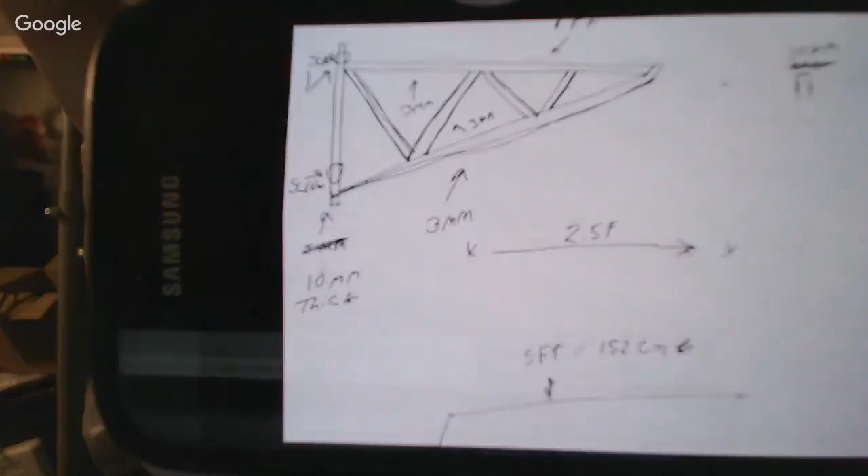Ah yep, got it. So the idea I was thinking of is I need to have the triangles inside the actual triangle frame to hold up the weight that I'm looking at. I don't know how much the weight is going to be. Is there a way that you can calculate weight for how much supports you'd need, or would it not need the supports because it has the supports in the infill?

Yes, this, okay, now this is where we get into structural modeling and finite element analysis, and this is what I went to school for. You can do stuff like statics and dynamics, deformation of materials. You can run these calculations if you know things like the cross sectional area or the second moment of the area of the part, and you can run a beam deflection calculator on it if you integrate along the varying area and varying second moment of area. You can exactly calculate ahead of time what your beam deflections will be.

Yep, static engineering, got it. A long, widely respected profession. It seems like rocket science to a lot of people, but people have been doing this for ages, ever since calculus was applied to engineering. So yeah, you can absolutely do that - a lot of engineers can do these calculations.

However, once you get to trusses, it gets a little more interesting because you're dealing with multi-part scenarios. A lot of people in statics and dynamics, and then deformable body mechanics, are taught how to do that with pin joints. It's a little harder to do with fixed joint things, where the beams are kind of structural. It's even harder when the material is not homogeneous - it's made of strands, right? That's when stuff gets a bit harder.

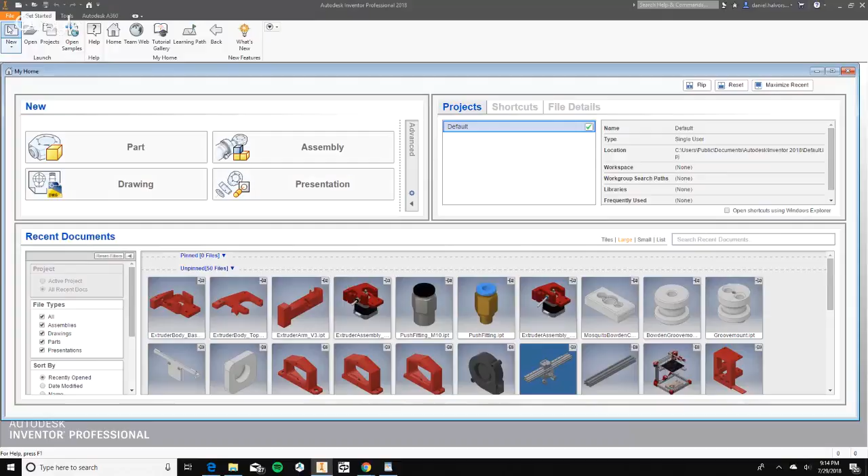Yeah, it's Inventor, a $1,000 program, guys. Yeah, I have a copy of Inventor - they sent it to me to try. I was like, what?

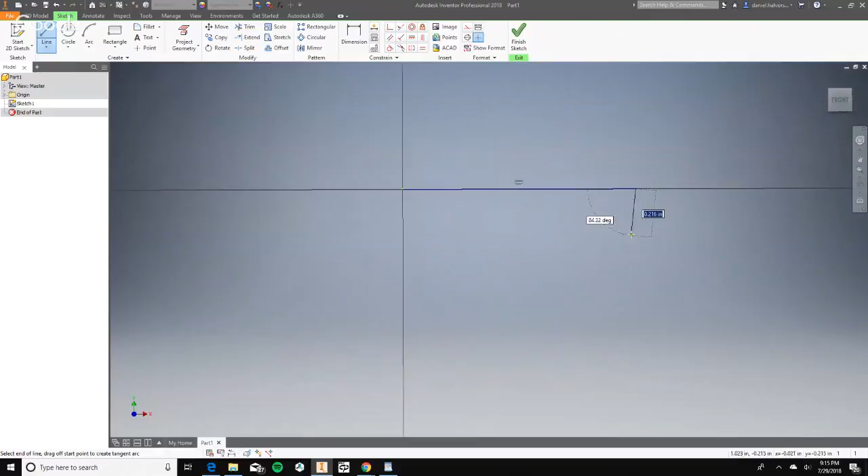Yeah, so here's - okay, let's see what we're dealing with here. We've got some shelf, and then we've got there, and then we've got there, so we've got this here. I don't know what your dimensions of this thing are.

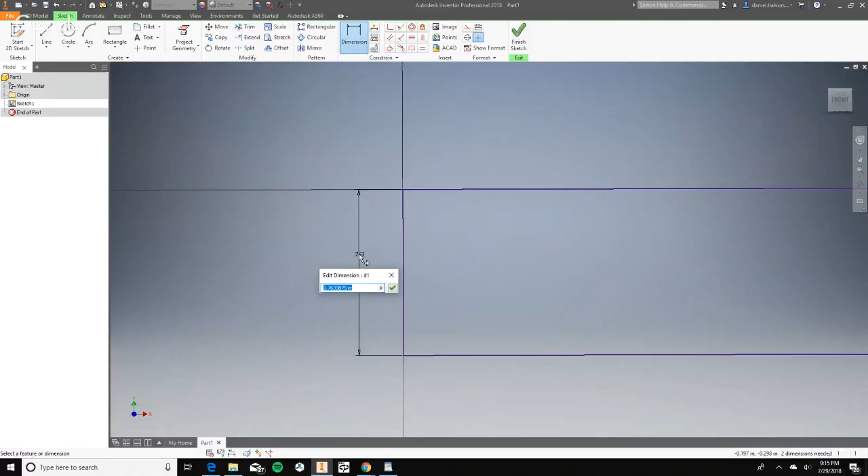Would you mind giving this to me - the overall size? I had it written down at 1 foot for length, that's what it came up with. I figured we would be about the right type of length. I figured 3 millimeters was going to be the back plate, where the triangles would connect. I don't have a length for that unfortunately because I didn't calculate it. But it was going to be overall about 3 meters thick, and I was looking at 10 meters.

Was it 10 meters? I said 10 thick - millimeters, yeah, 10 millimeters thick by 3 millimeters height for each connection for each of those. And what was the overall height of the thing? Overall height, 1 foot by length, and I didn't really calculate the height of the end of that yet.

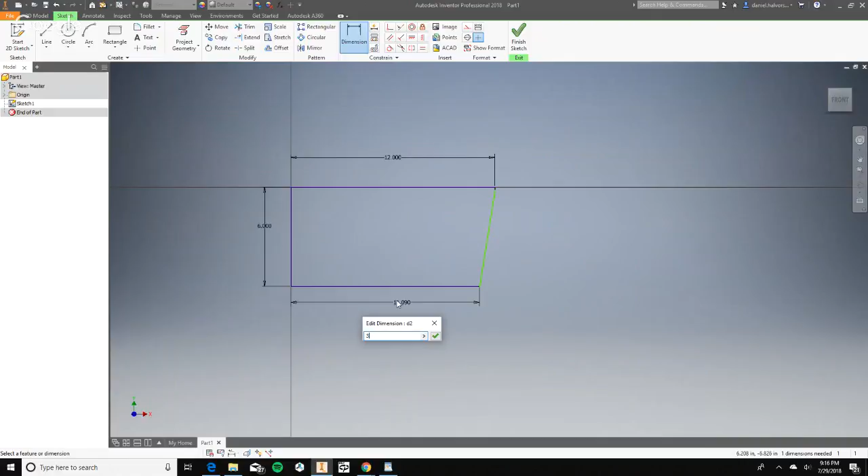Say it's like maybe 6 inches, and this is like what - 3 millimeters, this is also... You know what, let's make it all metric. I'm gonna do 300 millimeters for that, and I'm gonna do 150 millimeters for that.

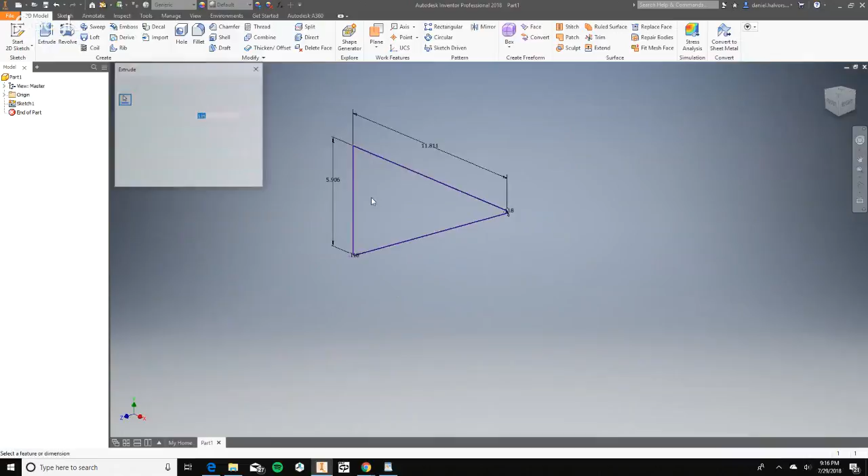All right, so say we've got this, and we're gonna extrude it. What was it, like 10 millimeters? I said 3 millimeters for extrusion actually, if I remember correctly. Okay, so I'm gonna do 5 millimeters because I'm gonna show you something nifty.

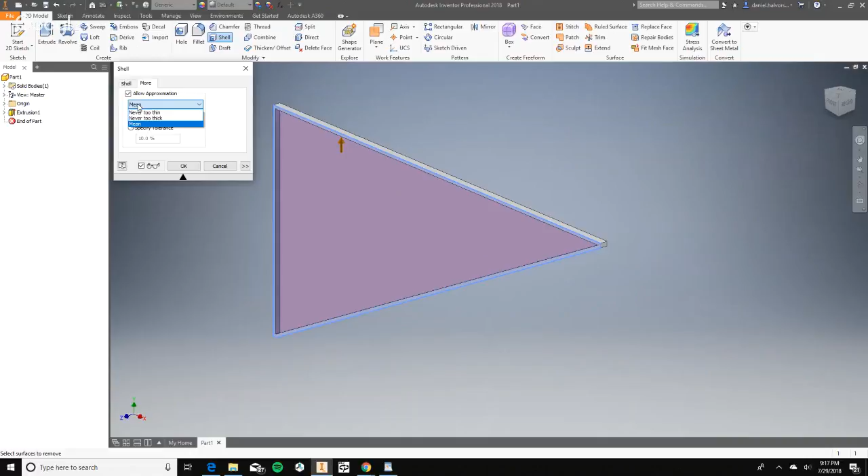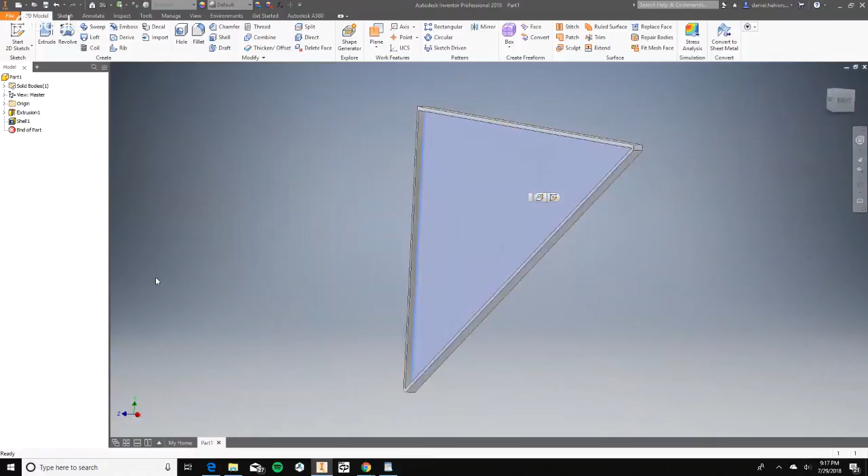The shell tool - so if we do it, it should work. Here we go. So what I did here, if you can see, is I hollowed out one side, right? So basically what we have is a triangle that's very, very hollow, very slim, and it's got this kind of a rib connecting the sides, right? You know what I mean by a rib.

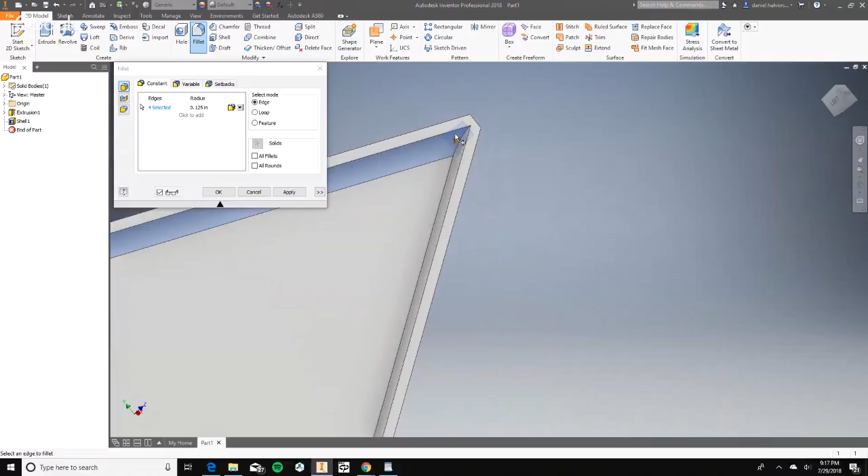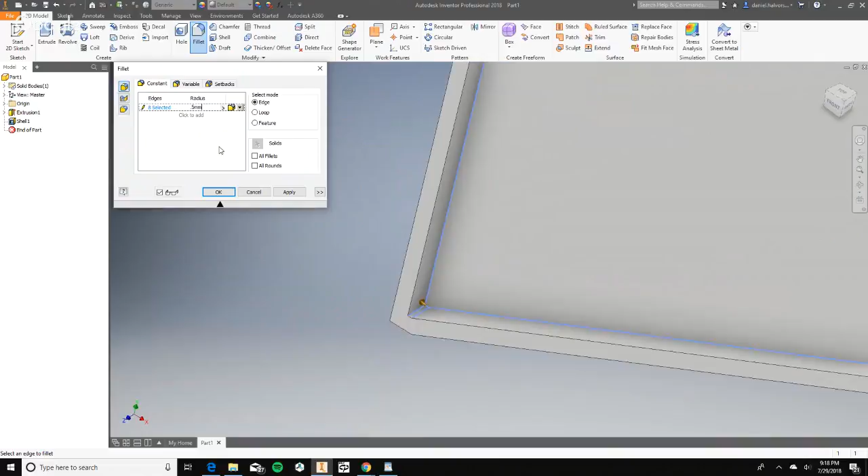Oh, I know what you're doing. Here we go.

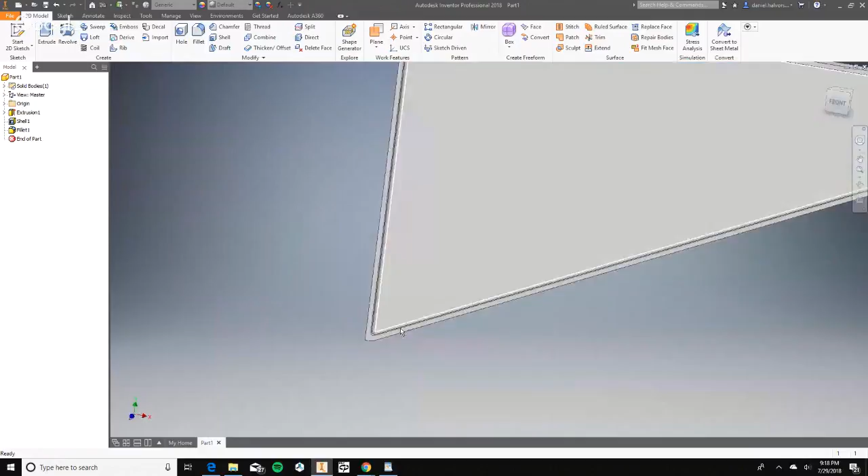So here we go - sorry if this is making you guys motion sick, I'm a bit used to it by now since I'm the one running the 3D mouse. So, all right, what this does - the fillets avoid stress concentrations, meaning sharp corners are where stresses in the material will tend to build up and break the material. So filleting ensures those stresses are a little more evenly distributed.

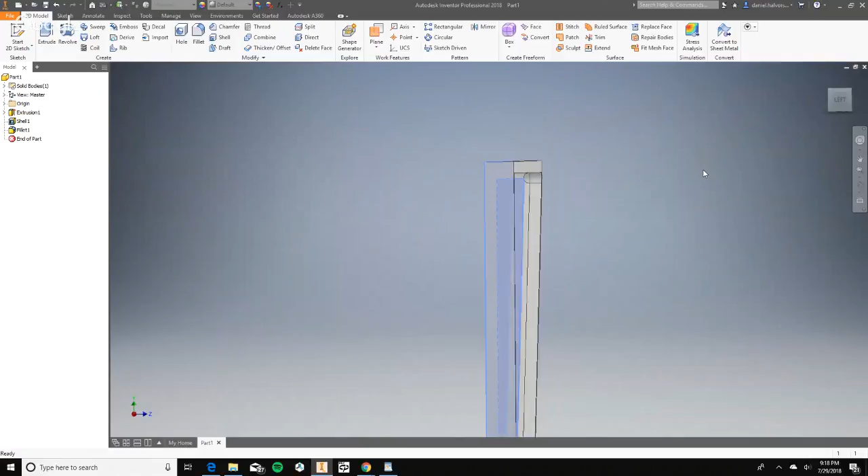So okay, here we have a part - I'm just going to highlight both of these so you can see. See what we're looking at here? It's got a very thin triangle around the edge, and then it's got a rib that's basically thickening it, or connecting it, but the majority of this side is kind of cut out. That ensures a lot of weight saving - in fact, this thing barely weighs any more than if it were just the thickness of that rib.

The thickness of this outer shell is not very much - just from here to here is like 2 millimeters. But it's actually substantially stiffer than if it were solid because of the higher second moment of area. So that gets into kind of statics and dynamics type stuff.

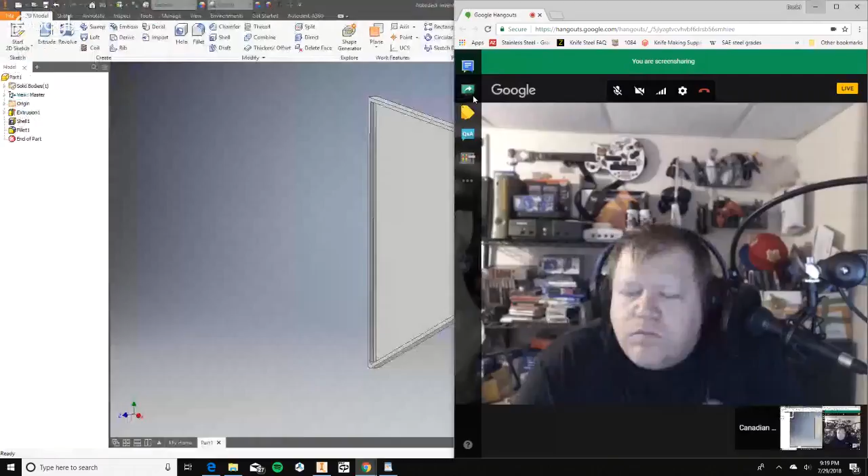Okay, now we're back. So that's kind of how I would design that. Probably sheets - sheets can be very sturdy for the thickness of them. That's what he was talking about, that we have to do it in sheets. That part of the CAD process gets me confused. I'm so used to doing it on paper with a pen, doing calculations when I'm building with wood. Going to 3D building is a bit of a different thing you have to go through.

Bringing circles into a triangle is what Chris Riley said. Yeah, I understand why you'd want to round off those areas, because that gives it more structural strength. That's what I was thinking too - how do I make that? That's why I was thinking trusses instead of circles. And when I saw you highlighting that area, I realized you were rounding it off so it has more structural strength - that's exactly what I was doing. Rounding that off avoids stress concentrators.

So I'm just CADing up an extra interesting bit here that might interest you guys - an extra thing you could do to increase load bearing capacity. I've never done CAD demos or anything before to show people, so...

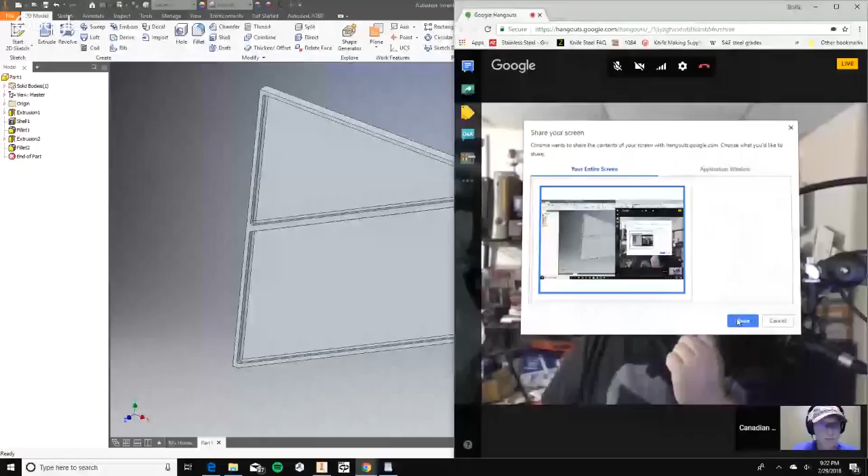Yep, here's one other thing I added - see this extra rib in the middle? Yeah, I see that right there. So what this does - say you've got a sheet or a shelf sitting on top of this whole thing, and you want to transfer its weight down into the wall here. This would take the midpoint and offer a nice short path of strong, solid beam, taking that force and redirecting it straight into the wall.

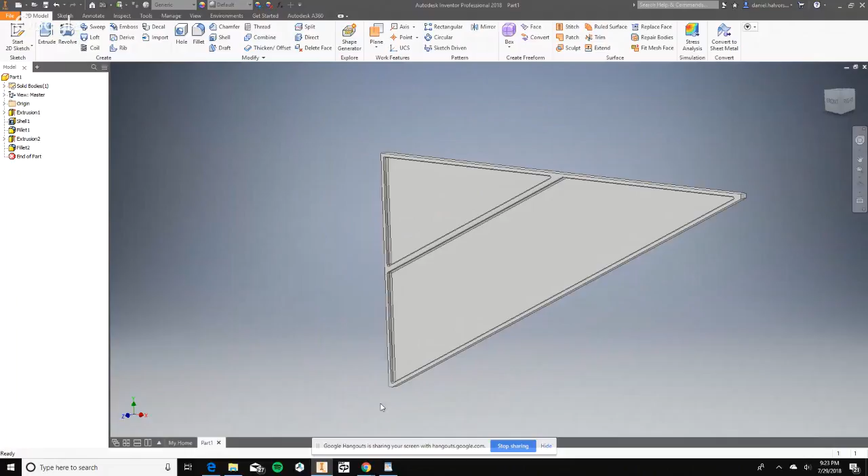This would also give you, if you had more mounting points, like 3 sets - down at the bottom, halfway in the middle, and at the top to screw into the wall - this would really increase that. Also, this will stiffen up the sheet in the middle, this flexible, thin back plane, and keep that from bending. So yeah, that's now a trick I would use.

Yes, trolling for dollars is right. It depends on if you're dealing with 2D or 3D forces. If you're dealing with 3D forces, you want like a 3D space truss. Not quite a rhombus, just a 4-bar figure - quadrilateral. So it's a quadrilateral, and a quadrilateral on its own is able to flex. But remember, we've got a sheet in the middle - the stiffness of a sheet is to the 4th power, it's very high. If you take a quadrilateral, which would ordinarily flex, and throw a rigid sheet across the back of it, it's suddenly very rigid. So that's okay in this case.

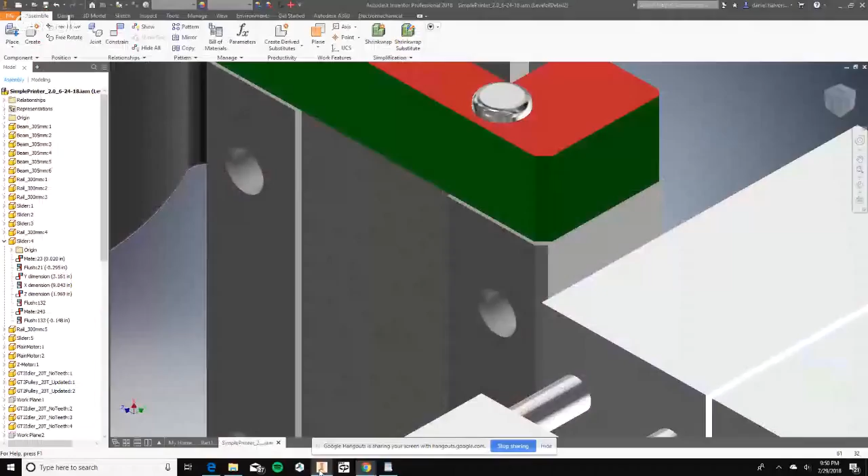Well, I've got something interesting to show you guys. I'm sharing my screen here. Got both videos open? Okay, so here's a 3D printer I've been designing, this is one current iteration of it. I'm actually going to go back a revision.

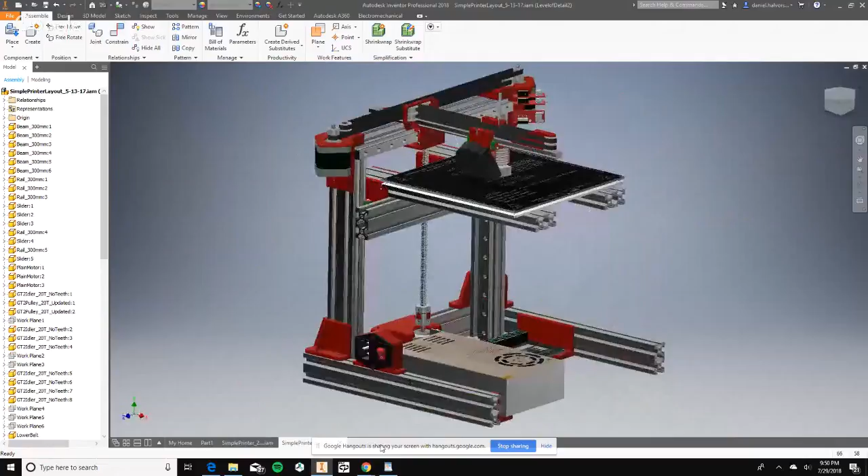Let's see, what should I do? Is this the one you wanted us to name? We're having naming competitions? Let me pull this screen up so you can see it. Got to check on the... might take a little while, but I can see it. Oh, his volume is louder than mine. Yeah, I have a headphone mic and it's a little distance from my mouth. He's got a real mic.

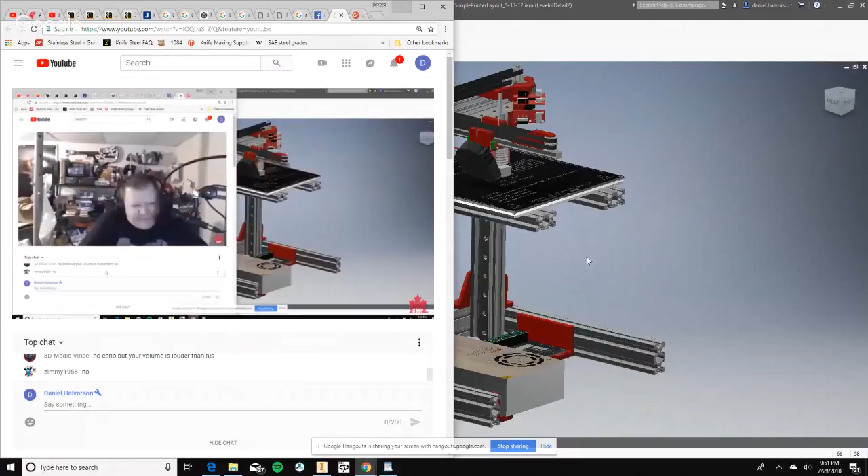Okay, so this is a printer I've been designing for our makerspace. It's almost done, so close to done, and it's going to be sweet. I'm actually going to try and have it working by Tuesday morning, which is going to be a bit of a stretch, but I'm going to give it all I've got.

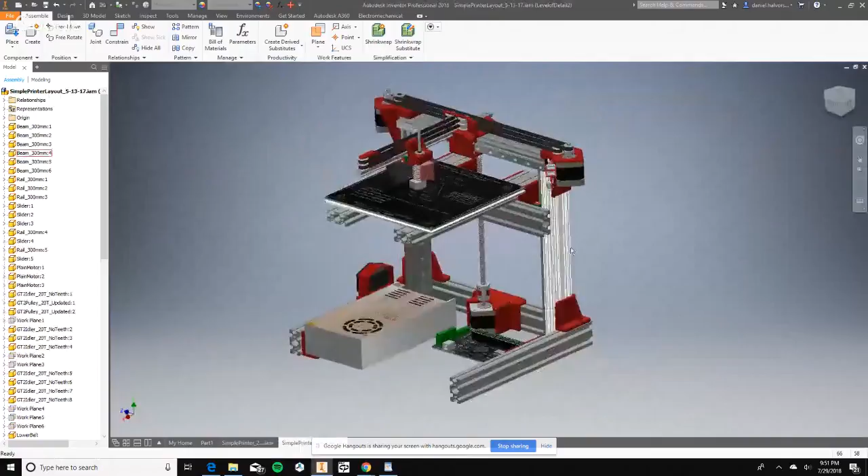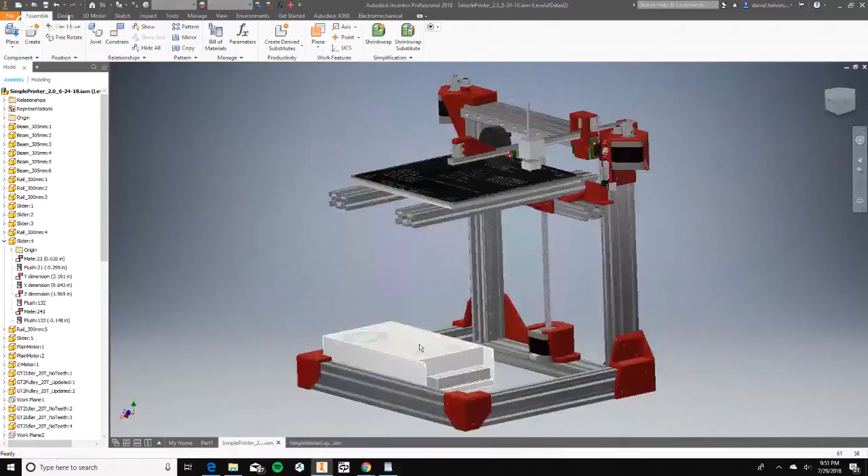The idea behind this is it uses all the same components repeated. All the beams are exactly the same length. Both belts are exactly the same. All the motors are exactly the same. All the idler pulleys are exactly the same. There's only like 3 different types of fasteners in this whole printer. Because of that, you can just buy a bag of stuff in bulk, and it ends up being quite a bit cheaper to build than an equivalent printer.

Oh, you're bringing your webcam back. Can you see me? Okay, yep, we can see you now.

That would be a fun one to do a speed build because there's no sorting of parts, you know? Isn't that always what gets you though? You get this kit and it's like, let's see, I've got a 3mm bolt, I've got a 3mm, well crap, they're like 2 millimeters different in length and I've got to use the right one. There's none of that with this thing. It's all just like either this bolt or this bolt, and you can very clearly tell the difference. It's kind of intuitive to put together because everything kind of only goes together one way.

Yeah, I can see it now. Daniel being way ahead of us. Hey, I designed it, I better be faster than you guys. I had this thing completely designed in CAD and all the 3D printed parts designed, and it was even starting to print them before I ordered most of the parts. So I assembled it in like 2 hours, had it working, XY at least, all the functions were working. It didn't have a Z end stop, so it wasn't able to print.

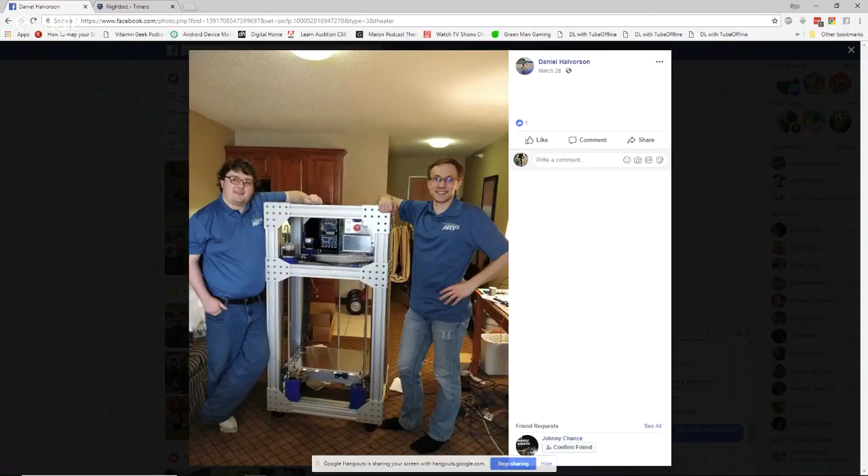Zimmy is correct, it is Eastern time. I just remember that machine - we're watching it roll in and just going like... and I remember Barrett going, 'Oh, you gotta come!' I'm like, 'Okay.' And he brings me in and I see this big block coming through. I'm like going, 'What the?' He's like, 'Yeah, come meet the cult.' It's like, okay, yeah, that was fun.

All these people I knew online. Here is the one that you were talking about. Yeah, let's see if I can pull this up. Let's see here. Share screen. Share. There we go.

Oh yeah, that was the E3D team standing around, and they're just looking at your printer, just staring at it. Couple things - one of the thoughts I was thinking they might be thinking is like, holy crap, this thing is insane. And then the other thing is like, oh man, I wanted to see this moving, but it's not moving. They also have this look of, we got to buy the company.

Well, yeah, we're in a different bracket than them. I mean, they're working with desktop, we're a bit more on the industrial side, but yeah, I really wanted to show them its movement speeds. It's just ridiculously fast - with those NEMA 23 size drop-in servos, that thing is just scary. It can cross that build volume faster than a human's reaction time. I mean, if you had your hand in there, you wouldn't be able to get it out in time.

It's 1.5 meters per second top speed. It's really trucking. So, yeah, the safety panels that we put on there are for your safety, not the machine's.

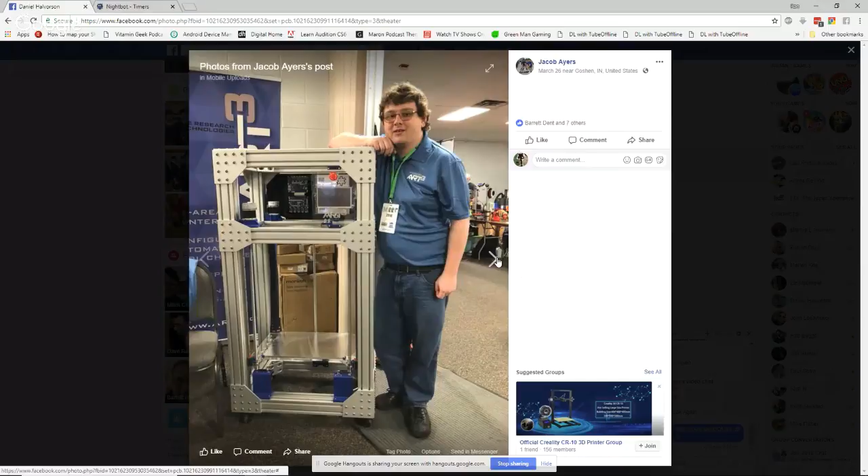The airflow isn't too crazy, as long as you do a PID tune, you'll be fine. A silicone sock is easier than a ceramic wool thing, much easier to slip on and off and deal with.

There's an idea, guys, of what they were doing there. This here is us in the hotel room working on stuff. This is probably taken at like 2 a.m. or something - there's no timeline on this, but probably. So that's the machine they were talking about. I was hearing so much talk about this aluminum monster. That's the one, look at the printers spread all over.

Did you guys actually go to bed that night? Nope, I didn't. Actually, I shouldn't say I totally didn't - I had like a 30-minute nap in there somewhere. Yeah, machine porn basically is the best way to put it.

Eric Cederberg is very knowledgeable. Yeah, so go back, I'm going to cancel this out now. But yeah, I just wanted to show some of those pictures because I thought some of them were pretty impressive.

Well, okay, let's put it this way - I'm looking at buying a printer right now. I'm at that point where it's like, do I go Delta, or would you not recommend Delta? What's your thoughts on Deltas? Okay, I have mixed thoughts.

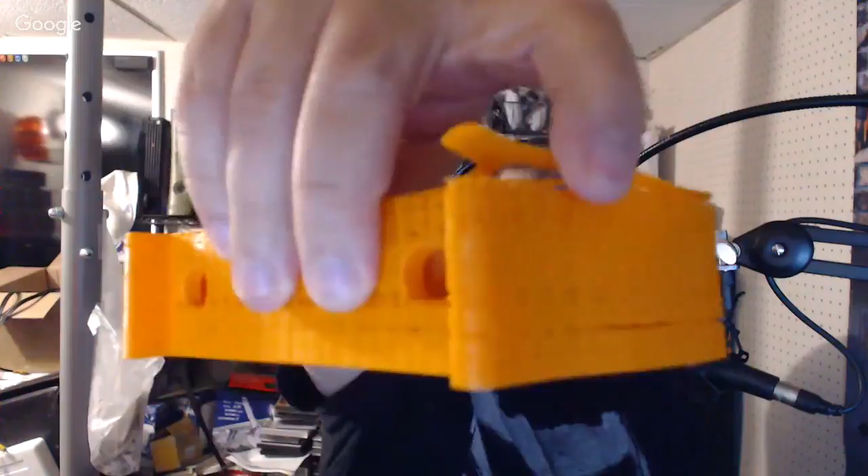Hey, there he is. My orange PLA was brittle, okay? But I want to show you what also it was doing because of it being wet. In print, it would lift off. Look at that, it didn't even seal. That's delamination, that is because the filament was wet when it was printing.

Did you see that? It has all these little popping weird holes out of the nozzle, and look at that, it sticks to itself. Yeah, look at that. And sometimes it'll be there and sometimes it'll just disappear on the other print. Like right here is the second print, and as you can see, some of it did not match, some of it popped. And right here you can see it's pulling apart. Yeah, nasty stuff. This was when it was wet, it was doing horrible.

Dried up, but look at it, what it's still doing. Better, and I don't know if this is why it's doing this on the orange filament. Better, but there's definitely more in there. There's something else going on.

Okay, I don't know what the heck is going on, but I'm getting a lot of beeping from Discord. Give me a moment here. All right, someone's jumping in and out of Discord. I was just getting it every 5 seconds. Sorry, but yeah.

It still was, that was bad. And that's when I found out water was dripping off of the nozzle. You could see the little bubbles and I could hear it boiling, the steam. Holy crap, huh? That's just awful. So that's why I had to dry it, and that's when I figured out I got wet filament.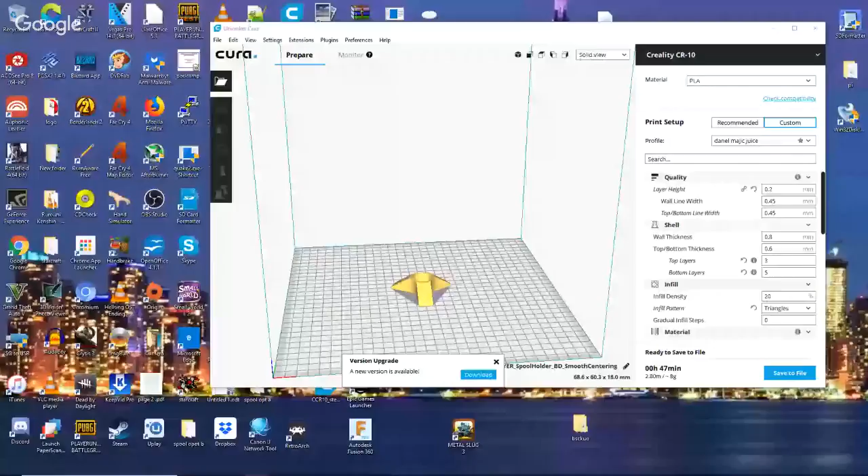Full screen, there we go. So as you can see here, here's the quality, 0.2 layer height. Wall line width 0.45, bottom 0.45. Wall thickness, top layers, infill density, triangles, gradual step.

Enable retractions just has a check mark in it. I don't know if there's supposed to be more to that, but let's have a look. Yes, there should be. Look under that material, retract at layer change. There you go. Retraction distance and retraction speed, that's what you're looking for.

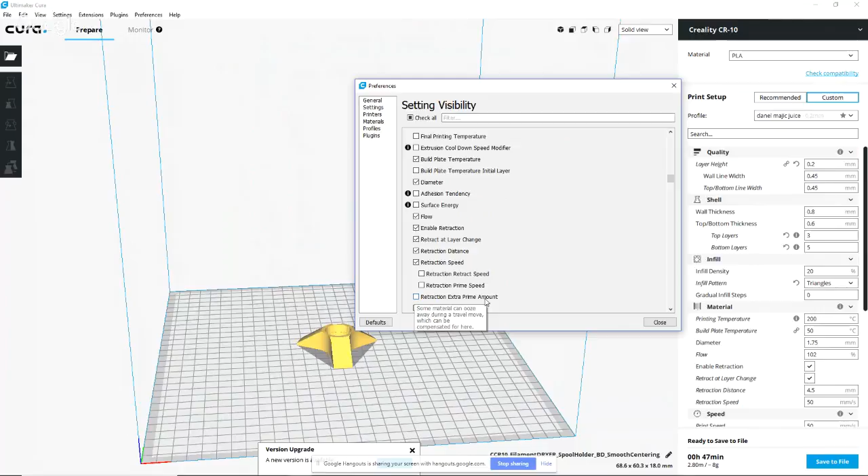Okay, do we want to also turn on these two, the retraction prime speed and the retraction retract speed? No need really, but yeah. How about retraction extra prime amount? Generally that should be 0. Okay, so oh yeah, let's look at this now.

Honestly, I don't get as good of results with Simplify3D as I do with Slic3r. Its control over extrusion widths gives you some really advanced capabilities that Simplify 3D doesn't have. I don't have Simplify 3D, unfortunately. Yeah, I think you can get good results in any slicer as long as it's properly tuned.

Okay, so looking at this right now, our retract at layer change is check marked. Retraction distance is 4.5 millimeters, and retraction speed is at 50 millimeters per second. Okay, those should be fine. I'm wondering about the CR10 itself.

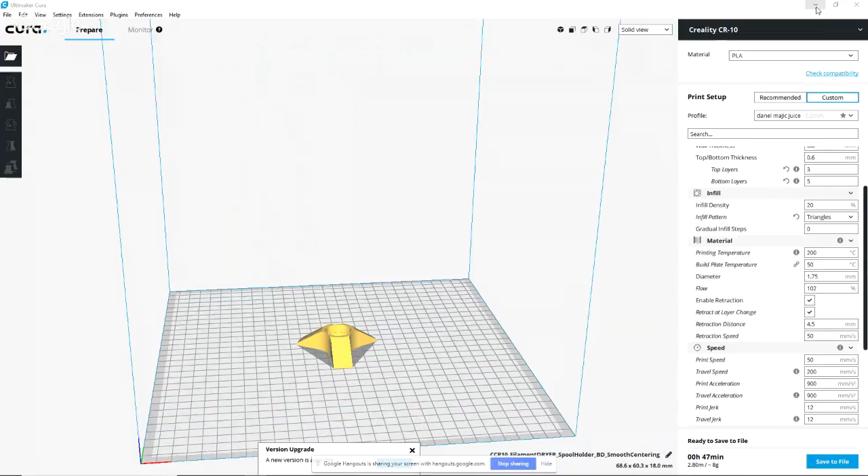If you were to go over that and check its settings... I wonder if it's... Let me just go over to that machine and pull that up for you. Stop it.

But yes, Slic3r, by the way, if you want to go into a little bit of what we were discussing for the talk show.

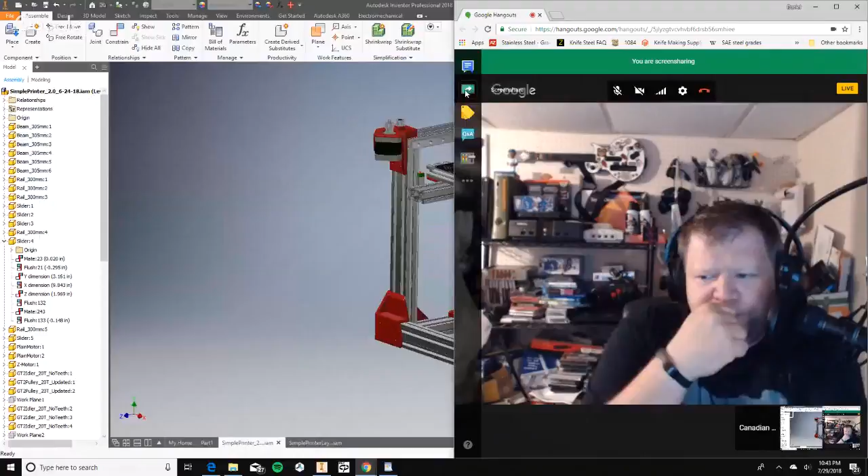So I would want to change that to what, though? I would just change that to something high enough where you're not going to have an issue with that being the bottleneck. You're going to want to change it to something with some headroom, like 75, 100 millimeters per second - something you're not actually going to hit. So 100 would do it at 50 millimeters per second, like you're commanding it to. Yeah, so try like 100. Change it on the printer - change the maximum to be 100. It's not going to hit that, but it'll allow it to do any speed up to that.

Well, let's see if my printer will accept it, because last time you were getting frustrated with that stupid printer - it wouldn't take it. Yeah, I mean you could make the changes, but anytime you did a power cycle, power off, power back on, they're gone. So I can always do the edit. And write that down to change it to 100.

Okay, what are the jerk settings on it? I can't remember, I don't think you included those here, but I do remember they were too high. Did I include a jerk picture? Yeah. I didn't see that. If I didn't, I can provide that to you right now. Yeah, let me have a look. Okay, yeah, you didn't post that. Oh, I didn't. Okay, Y jerk.

Here we go, let's see what numbers you're looking at. Share that with Messenger.